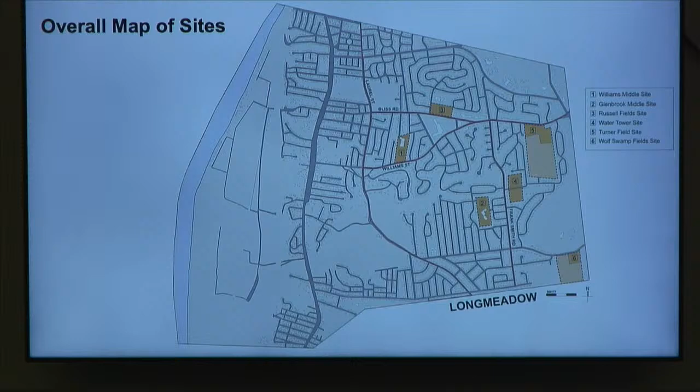Marty? Yeah, I agree. I think this is such a helpful visual for me to think about location. The best way to think about this quickly is: if you build anywhere other than the Glenbrook or the Williams site, you lose the investments made in the Turner fields or the Wolf Swamp fields, and they're beautiful fields. You lose that investment. You lose the opportunity to have the MSBA participate in the costs of demolishing one of the buildings. And you're adding the cost of recreating athletic fields, which we've heard over and over is a really important concern of residents.

I think when you factor in everything, there's so much we have to balance, and I really believe we have to be responsive to the concerns we heard at the last meeting. I thought the community forum at the Council on Aging was excellent, and it really helped sharpen my thinking about what we need to do and how we can potentially mitigate the traffic concerns we've heard. It was a very helpful meeting, but this is also a very helpful slide, and I'm glad we had the opportunity to go back and revisit the site selection process.

It's really helpful. Josh? I just want to add one follow-up point on the fields. If we're moving them, we're taking away fields from a generation of kids. There's a prime time when kids will be using certain fields, and if they're gone for three years, they'll never use them. We have a lot of fields in town, but we don't have enough — a Parks and Rec study told us that. If we take some away, we're in a worse position, and there's a specific cohort of kids who would be affected by that. That would be a shame.

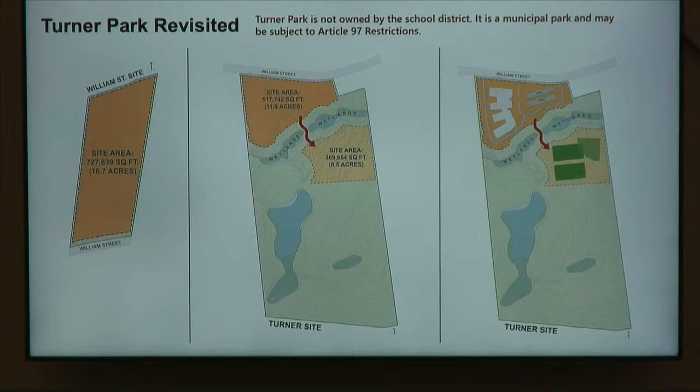Yeah, I mean, this is just additional considerations that we had during the process, and I'm glad we're laying them out so everybody can see what the process was as we went through multiple iterations.

Any questions for Dory?

All right, so we'll move on to agenda item 7, review of the current PSR design explorations. A lot of this was good input that we got from the community, from correspondence, emails, calls, and the community forum. We really are very much listeners, and will continue to have conversations. It's funny, because even after schematic design, when we're in document development, we're still having conversations with the abutters about tweaking things. So this will continue.

After schematic design, when the town has voted to approve the project, then we go into the document development phase. So it's an elongated version of getting to the document phase, longer than you would think, but because it's a public process. When we're doing the conversations prior to the vote, people will be seeing a fully rendered building with all the materials established and clear, not detailed enough to build, but detailed enough for everyone to understand. So we're still a ways from that.

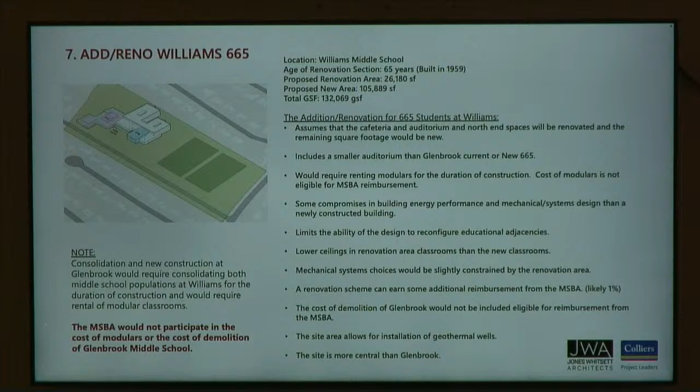So we've talked a lot about the fact that MSBA will not cover the cost of modulars. Can we put some context to that? Like, how much is a modular, how many do you need, and roughly how long do we have to have them for?

Let's see, we have a school of 665. We priced modulars for Holyoke for a school of 600, and believe it or not, that related to the duration of construction at about $2 million. I'd say now you're probably within a window of 2 to 3.5 or 4 million. And that's again sort of unreimbursable. Great, that's helpful to know. Thank you.

On this site, you would also be deciding whether to put the modulars on site, or you could conceivably put them at a different location and shift the entire school elsewhere. So anyway, this again focuses on some of the challenges here.

You would retain the auditorium, but it's a small auditorium for a school of 665 students, serving its current population. It would be undersized and can't simply be expanded, but it was a valuable space, and that's why we approached it this way. There would be some compromises in building energy performance, since no matter what we do with that renovation, there are still some constraints. So it's slightly less well-performing than a new school would be, but not significantly so, since it's not a huge portion. There would also be some constraints on our selection of mechanical systems.

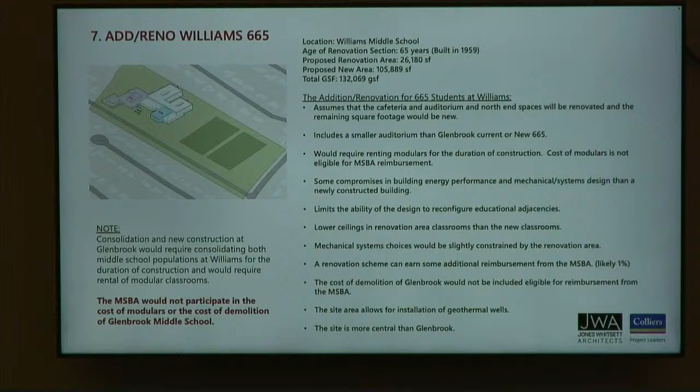Going forward, we have a couple more slides on each of these, so just to give you plenty of time to look through all of these. We're going to jump to site. In all of the schemes, you're going to see that we're trying to show some of the potential circulation, assuming 200 parking spaces, assuming an outdoor field that has area around it so we can adjust the field size, and showing how that would generally work throughout the site. On the right, trying to show, as was requested, the queuing potential—not the queuing that you're planning for, since we're only talking about 4 buses, but you could conceptually show more buses here without any conflict. The yellow reflects the buses, and the white reflects cars, to give you an ability to see the difference between these options as we go through it.

And again, that's mainly because of the breadth of that area—it doesn't mean that 7 buses will be there. So we're showing a primary, what might end up being likely faculty parking space on the upper left. Visitors might also be in that area. And then you have the parking wrapping and extending around, so some of the parking is a ways off from the building.

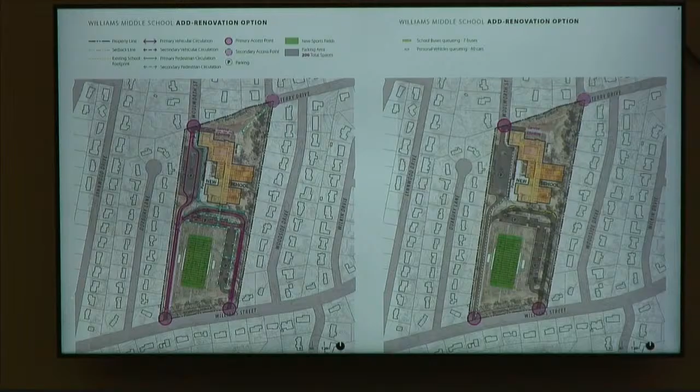Just to underscore it, this is the add/reno option, even though it says new school on the plan—I wanted to clarify that, simply trying to say that portion of it is new. Service and loading is still a question on my mind on these options, on the new add/reno, but that's a detail we'll work on further.

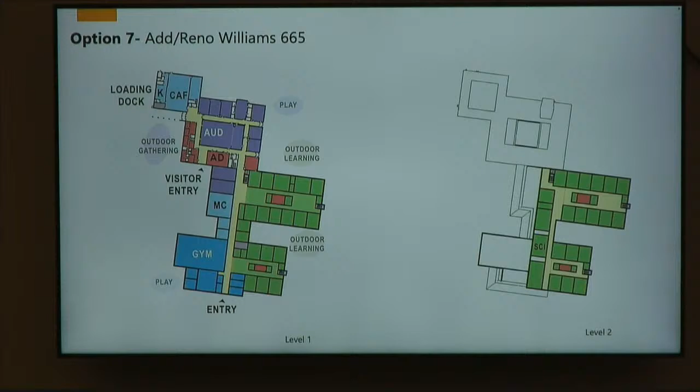This option, we showed you 3 or 4 options last time of different configurations for the new construction. There was a question about efficiency, so we wanted to take one of those schemes that seemed kind of tighter and try to explore that a little bit more, partly to show a cafetorium option to you.

So that's taking the one we called angled wings, which shows the stage attached to the cafeteria, and you'll see this in plan a little bit more.

All of these options ahead ultimately have the same benefits in terms of that original list of priorities you had: you could keep students in Williams while this is being built. The cost of Glenbrook demo would not be eligible for reimbursement, but Williams would. Now you lose the concerns about compromised educational spaces or ceiling heights. You get some better daylighting, and it allows us to work with the district to try and meet those adjacency goals the district had throughout, rather than having to compromise them.

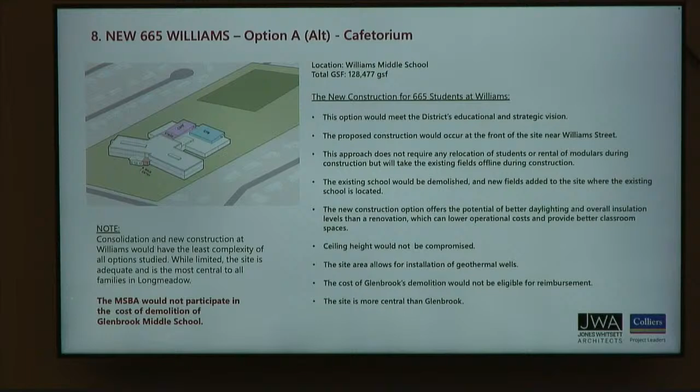Go to the next slide. This is also, you'll see, 128,477 square feet. That's important to note because that shows the difference when you include the auditorium.

In the site plan, this again takes from what you saw previously, where we're again trying to do 200 parking spaces, but we would be redoing completely that field area at the back. It's hard to see because the underlying building there is in white, but that area around the field would all be green space, as well as the far northeast corner.

You can kind of see that what this does is it puts a very 2-story wall pretty much towards Williams. That was one of the things we found in our conversation was a challenge. It brings all the classrooms to the front, puts all the community spaces to the rear, and allows you access directly through a plaza into the building at the rear for nighttime events or basketball, etc.

And then you see that dashed line around through the green, that's sort of a soft line that reflects the fire and police access that would only be in emergency conditions. That would obviously get designed based on what we do back there, but that's simply to imply that you have 360 support around the school.

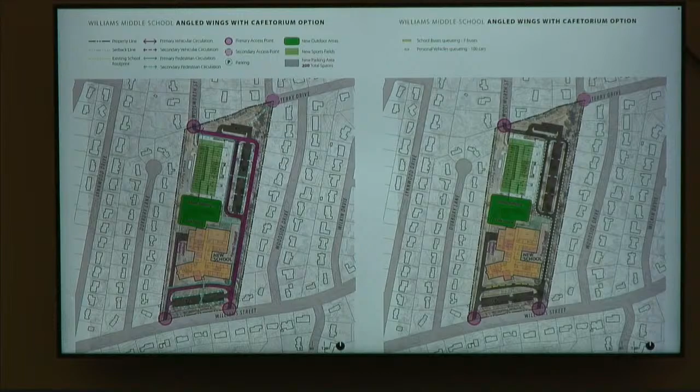Hey Dory, just the one question I have: they all show a central corridor, which I know they said they wanted. From a safety perspective, do we have a safety consultant who signs off on that?

Okay, right, all yeah, right, you'll have a safety consultant who'll be very involved. Okay, yep. I just think the line of sight can be good and bad, different perspectives. Yeah, it's actually a really controversial question, you know. Okay, so thank you. At this point, these are pretty schematic, right, you know.

How undulating that is ahead. So just in plan view, you see that this separates the CAF and Media Center a little bit because we have to get those classrooms around the gymnasium and all the support spaces around the gym.

Gives the gym north light and cafeteria north light, which can be really nice. It gives the classrooms the lighting they need and does have a very, very strong central axis. And from a traffic flow perspective, it gives you this point in the middle here where a lot happens, where we're showing sort of implied stairs.

It keeps the admin to the front of the school, facing towards Williams. So I think it has a very strong read as being a school from Williams as you drive by, which some people may prefer.

Otherwise, it does have those spaces around the school that can allow for outdoor learning, particularly focusing on STEM. So across from the media center are the STEM spaces. And then we have music classrooms near the cafeteria in order to be adjacent to the stage. And it keeps a loading dock to the west.

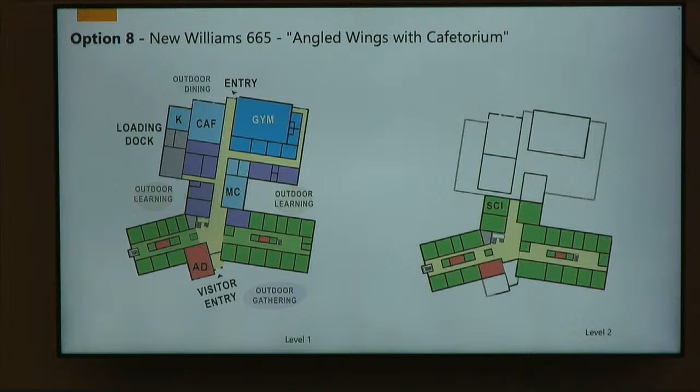This option is the extension of the design that was pretty strongly supported previously. There was a request to look at how that might create a situation where, if you look at the site plan, the queuing goes up and back, so perhaps there needs to be an entry to the west rather than to the south. This actually allows for both accommodations. Again, this option includes the auditorium.

Can you hold on for one second? So I'm looking at that plan again. That plan queues 100 cars versus the 60 we had. Yes, 100 cars in the queue. Okay, thanks.

So you can see this is a larger footprint. This reflects all, we've done this with the gym and auditorium, and also with a gymatorium, but it could be a cafetorium. We just wanted to differentiate a little bit here.

So I think that you now know the values of the new versus the previous option. Going to the next slide.

So this is just a small revision of what you saw relatively speaking on this one. We tightened up that parking so that they were all consistently 200. This shows 100 vehicles in queuing, and shows the potential for as many as 7 buses queuing. It also shows that play area with circulation going around. So those are the major changes.

Again, it does keep the width of the road, widening it really to allow circulation through from Woolworth through the site, but not as a direct path. It becomes kind of separated from the parking, going to the east side of the site rather than the west side.

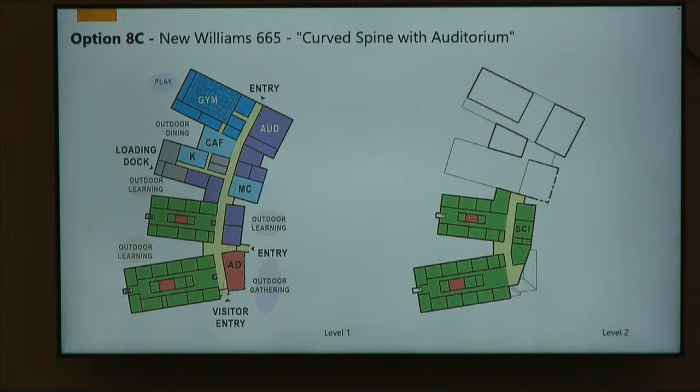Sorry, Josh, on that design - you mentioned that you get nice light on the cafeteria if it was on the north side. So would the cafeteria be kind of dark here? Well, it wouldn't be dark, it would be west-facing, because the cafeteria will have super high ceilings, but it is more west-facing, and we're concerned about that as well.

We sort of played with it two ways. We kept it there because the principal liked having the ability to supervise the cafeteria easily from a main axis. It would also be possible for this to be designed such that it would be more within that second bar and have more north light instead of west, or a combination of north and west. So it could be configured in different ways, and getting reactions is helpful. But we were trying to support their desire to have the gym-cafeteria connection and the cafeteria-media center and corridor connection, and have it be essentially part of that end of the school, and easily accessible to everyone.

Roughly, if you add the auditorium, how much square footage does it add, all things being equal? If you add an auditorium... 4,980, more or less. Yeah, and those become the rules that we try to live with.

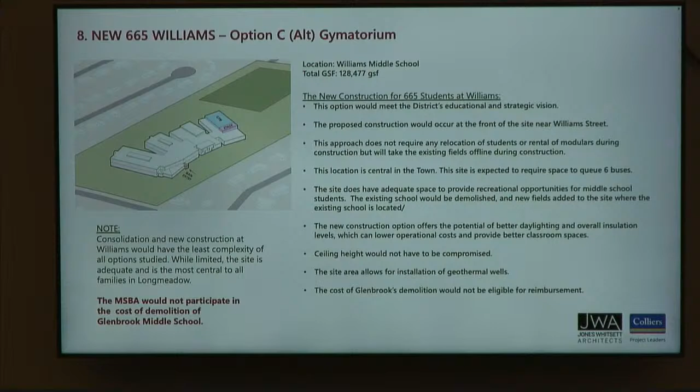So this option, moving now into the next option, where the stage - just to explore the option - we put the stage at the end of the gymnasium, so you drop that square footage down. Going into the next slide, you don't see a lot of difference in the plan because it's a relatively small change. What's actually happening, I believe, is that top bar is shifting a little bit, which is what you mostly see. You can go to the next slide and see that laid out there.

Right, so you see that purple chunk - that's circulation into the gym, and that, in a sense, is different than the Granby design, where it was on the side.

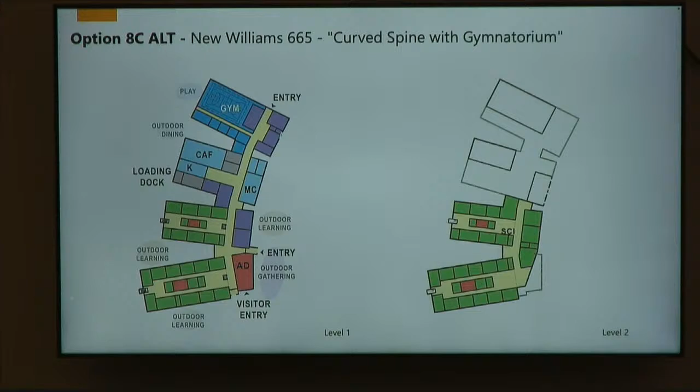And if the stage were in the gymnasium, we would design the gymnasium to feel good as a presentation space. That would put a different challenge on us, but that just becomes part of the challenge. You see the cafeteria here has that position I was talking about, north with a bit of west shift. The cafeteria has its own access through the interior, so all things we can explore.

So I just thought we'd pull back to this slide, which we used in the community meeting, to remind you what we're looking at here at the moment for cost estimating, pending your decisions. Glenbrook code upgrade and Williams code upgrade are required to be estimated and carried forward. One's already been done, the other will be done. Now we're looking at the Add/Reno Williams 665, the new Williams.

The 3,700 square feet is the size of the Williams auditorium. The difference is the new full auditorium gets a little bit bigger. Then there's the cafetorium and gymatorium options, as you've seen, new options. At this point, we could take all of these in, or essentially eliminate in our minds one of the green options, your call really, because they're going to price out the same. There's no real need, we can stop and talk about these, but this just puts us back here.

And then, if you want, as we did before, where we had a matrix and you all talked about it and wanting to communicate with it, we can do that again. If you go to the next slide, we now eliminate that and take us to what we're looking at here in a numerical way. Again, this is up to you all to revise further as you like.

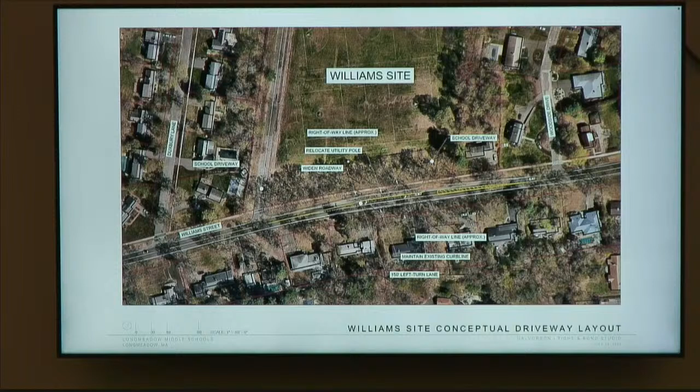This is definitely taking the design beyond the PSR phase we're at, but we thought with the interest in this specific issue, thanks to Tighe & Bond for really getting into more detail than we're used to at this phase of the project, we wanted to evaluate the possibility of this. Since we're hearing from Tighe & Bond, additional...

What's going on with, what's the plan on any of these with Woolworth? Are you at that point? Is that expected as an entryway at all, or is that exit? So as part of the traffic study, we looked at a single access point where it is today at Williams and closing off Woolworth. That was kind of the worst case scenario, bringing all the traffic to a single point. So we'd expect to see better operations if you're adding the 2 driveways on Williams Street plus an additional access point on Woolworth. You're just further dispersing the traffic headed to the school.

I think it's really important that we keep Woolworth open as an entryway. It would help this side immensely, and people are going to drive that way if it's closed off anyway. So if we take that into consideration, I think this would be very helpful as well. That'd be a good idea.

I just want to clarify though, you ran multiple scenarios. One of those scenarios was closing Woolworth. It was a possibility, it wasn't a decision, nothing was made. It was what would happen if we closed it off on the site? Then we looked at multiple other scenarios of widening the road, making the loop. I just want people to understand that multiple scenarios are being looked at so that nothing can be said that the committee didn't look at all of the opportunities that presented itself with the traffic.

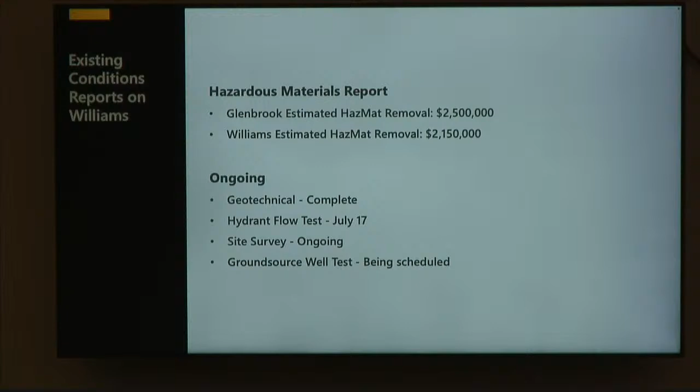And the geotechnical report - can we hold on one second? I just want to make it clear to everybody about the hazmat, that to the best of my knowledge, Lynn you can correct me on this, that it is totally encapsulated hazardous material at this point. It's not exposure, but it does need to be remediated if we go and take down the schools.

Okay, thanks, because I have heard a couple comments in the community in the last couple weeks about there being asbestos in the school, and I just want to make sure they understand it's encapsulated asbestos as opposed to free and loose. Yes, it's often underneath the floor tiles and places like that. So it's very much intact.

But it's important to note that those figures reflect costs that are part of any demolition of either of those two buildings, and any renovation project as well. Thanks, Dory.

The ground source well test has not yet been done, so that's still in front of us. All right, upcoming, we've got next steps.

Adam, I'm looking at you on this one. We have our next meeting scheduled for the second week. Do we need an additional one at the end of the month for the submission review? If we're looking at the end of August - is anybody gone? What's our next meeting again? Our next meeting, 14th of August. I'm gone for...